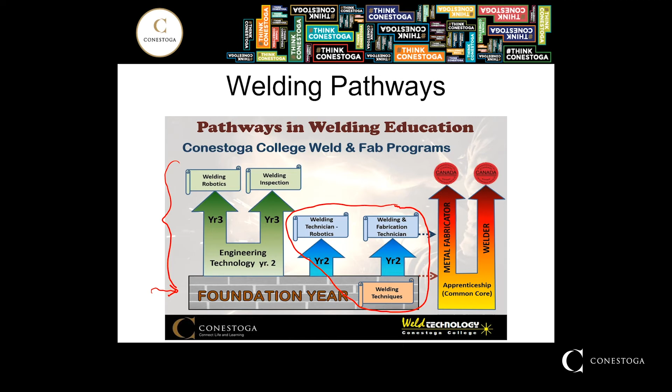With the way the technology has changed over the last several years and the addition of more advanced software to help with the learning process, Conestoga has introduced a bring your own device requirement for most programs. The program that we're talking about today is no exception.

As you can imagine, there are a variety of different options available for computers. We're essentially specifying that a laptop be the minimum requirement for each student as they enter these programs. Given the types of software that we do use, whether it be AutoCAD or SolidWorks or offline virtual robotic programming software, the requirement for the device needs to be such that it can run all of these different things.

Again, students will have access to these tools for download or virtually tapping into the servers at Conestoga College in order to run those software platforms that we're looking for.

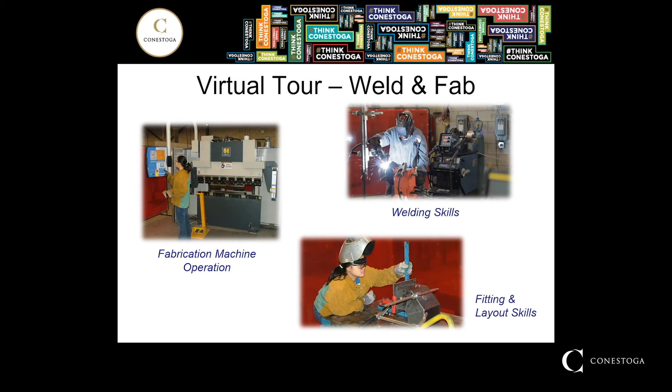This next stop on the tour highlights the cutting skills area. Again, each of the 45 booths we have all have the ability to provide oxy-fuel cutting and brazing operations, as well as the welding processes I mentioned earlier.

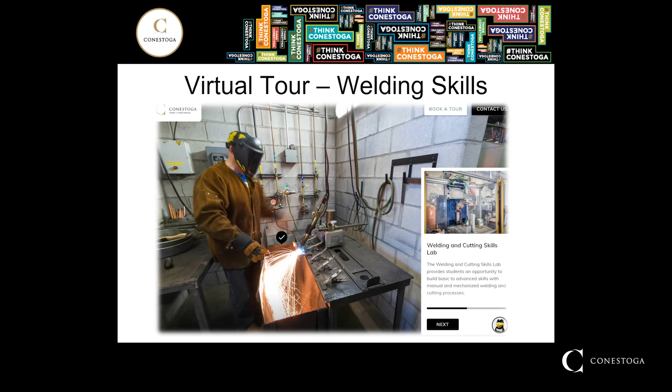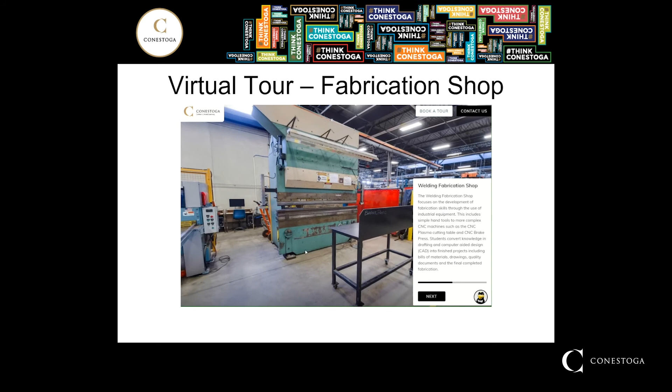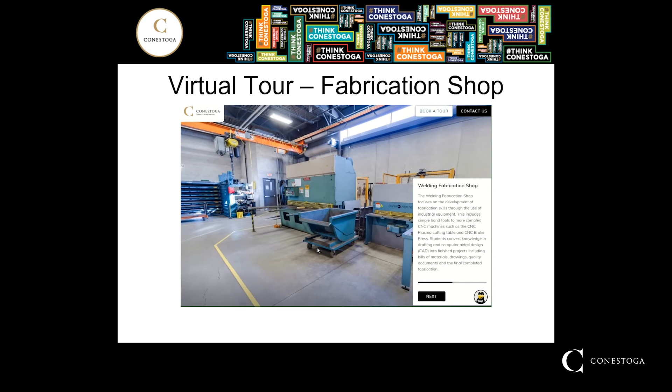Included in the virtual tour is the fabrication shop. This shop includes a variety of different machines that students will have hands-on experience operating, from manual brake presses to a variety of different plate shears offered - there's a small one and a very large one - to a CNC operated brake press and a CNC cutting table using the plasma arc cutting process.

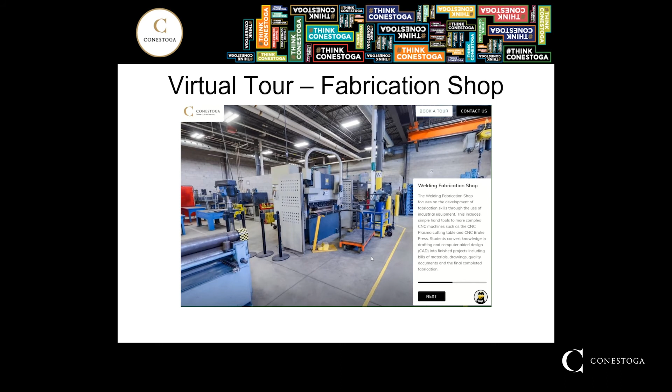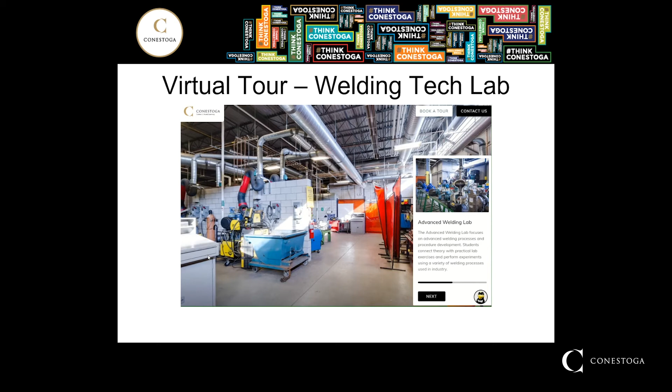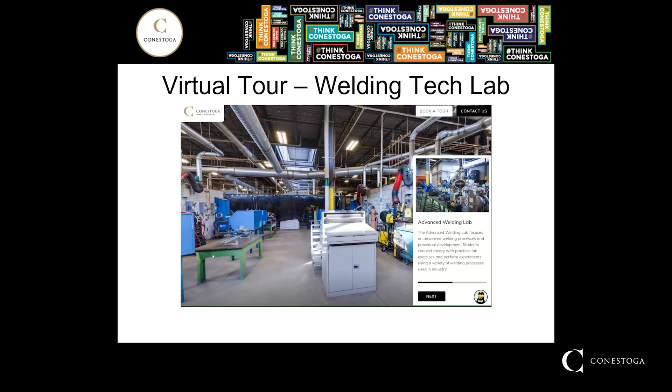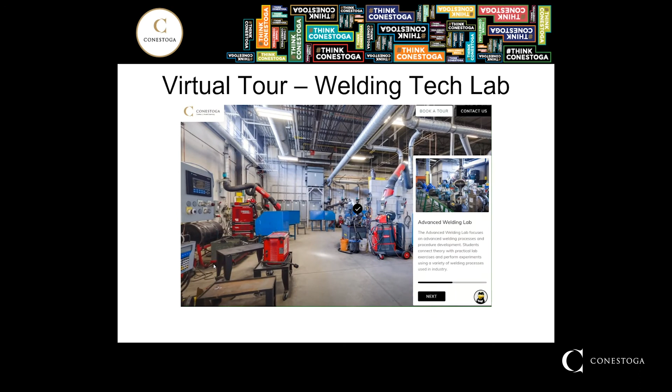The Welding Technology Lab includes a variety of different manufacturers' welding processes, with a heavy focus on non-traditional welding outputs. This would include things like pulse welding, that's CMT from Fronius. As you can see, the equipment in here is more varied, and the learning space is a little more modular to allow students to explore a variety of different processes through their studies. It includes operations like a submerged arc welding system, as well as two spot welding systems you see here.

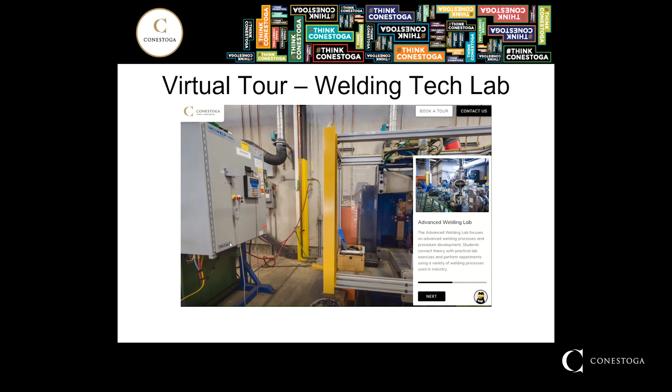Our next stop is the Welding Robotics Lab. This is an area in the second year of the program where students begin to learn how to program robots using a teach pendant. There's also an introduction to offline robotic programming, which we'll show you in a second. This lab has a total of 6 welding robots in it, dedicated to our space.

As you see in the animation below, a robot has been programmed in the virtual environment by bringing a 3D model of the part into that world. That information can then be downloaded and transferred into a robot for actual operation and welding to occur.

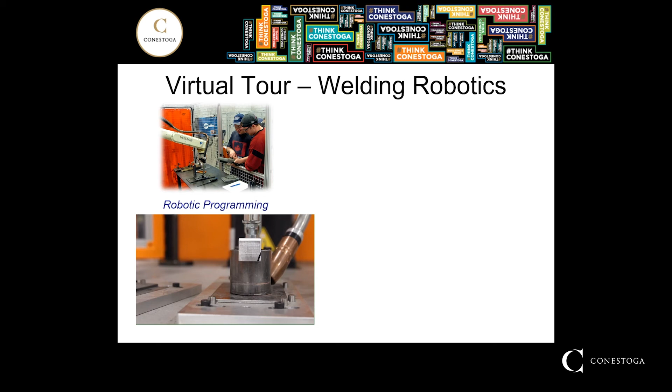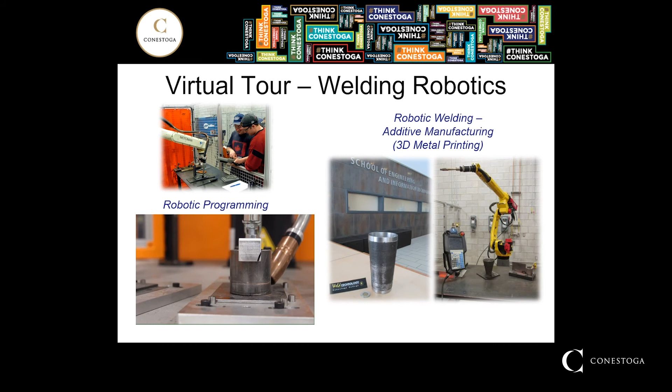In our third year of the program, students are provided an opportunity to work on an advanced technology project of their own choosing. The image on the right shows a project some students did in additive manufacturing, basically 3D printing with metal. Their final product was a mug made out of stainless steel - pretty technically advanced for programming completed on a teach pendant rather than in the virtual world.

We take a look at the welding inspection side of things. Regardless of which engineering program you're in, robotics or inspection, every student will get an opportunity to work with the inspection tools available to us at Conestoga College. In this image, we have a couple of students working with microscopes to look at the microstructure of a welded sample. On the right-hand side, we have students working to identify defects in welds below the surface, not visually represented by the naked eye.

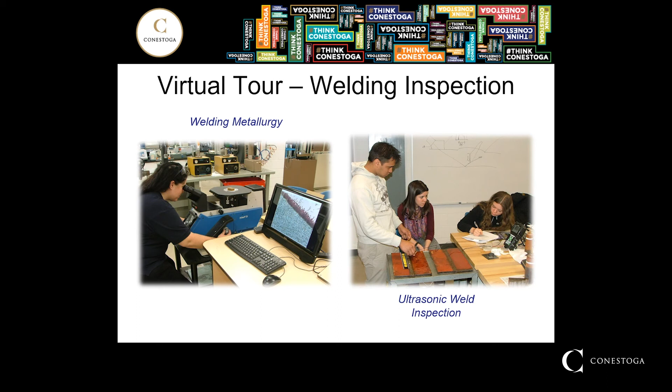So what does all this mean? At the end of your 3 years at Conestoga College, in the Manufacturing Engineering Technology, Welding and Robotics program, the job opportunities are quite vast. A majority of our students find work in the fields of manufacturing engineering management, automation systems integration, production planning, industrial process engineering, and a variety of other avenues, like procedure development for quality control systems. We find that these students are very successful in gaining employment and moving up with the base knowledge we've provided here at Conestoga College.

Now my favorite part. Quite often we get the same questions over and over again when we hold information sessions. So I'd like to give you some information up front here in conjunction with what I previously provided. One of the biggest questions we get is, can I switch into another welding program from this one?

Well, as I mentioned on one of the previous slides, absolutely, provided that the course is not full when you want to make that change and you have sufficient grades to allow you to make that change. Again, Conestoga offers 5 standard programs available in the welding cluster at the Cambridge campus.